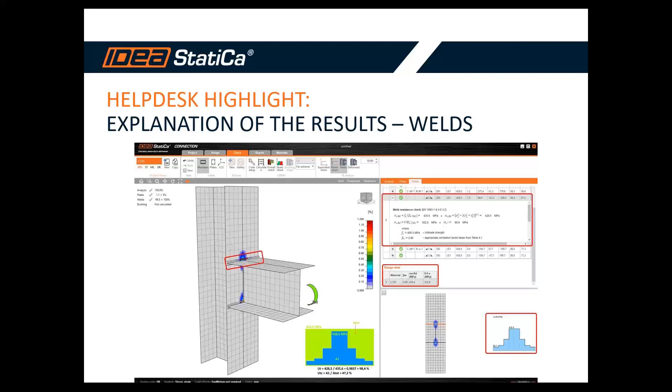All right, so let's jump to the project that I'll show you live. It's a project of a steel broadcast or telecommunication tower. It's designed by an engineering office, Tecom CZ, which is one of the leading suppliers of telecommunication towers and masts. They have designed a lot of projects all around Czech and surrounding countries, mostly telecommunication towers, but also watchtowers, which is quite a phenomenon in the Czech Republic. We have a lot of lookout towers just for touristic pleasure.

So they designed this, and of course analyze, calculate, and then supervise the construction. Tecom CZ is a long-time user of IDEA StatiCa, and they use IDEA StatiCa together with SCIA Engineer with the BIM-Link, and as they told us, that brought huge effectiveness into their design workflow and cut a lot of design time. So that was nice to hear from them.

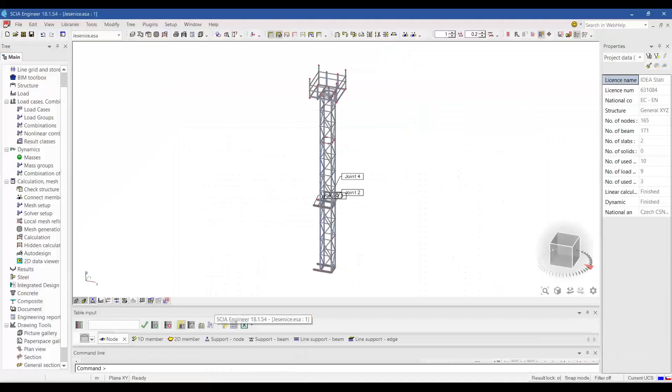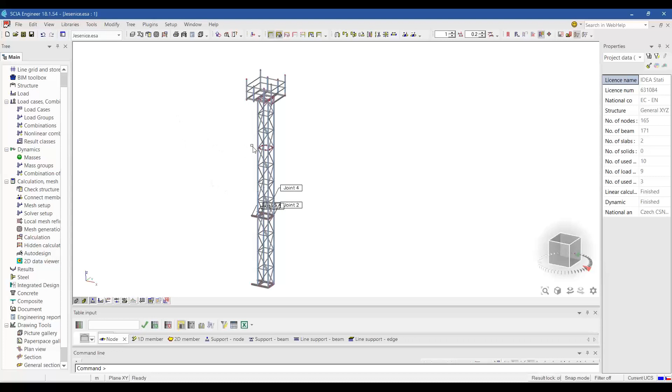So I will jump to the SCIA Engineer software, and this is the project that we got from the customer. That's the steel tower model, a global model for global analysis of the internal forces. So how does the BIM-Link with IDEA StatiCa work? When you install IDEA StatiCa on your computer, it integrates into your FEM and CAD software. SCIA Engineer is one of the FEM programs that we support with the BIM-Link, and that adds commands into the steel tab here. Here we get the IDEA StatiCa connection menu with two commands.

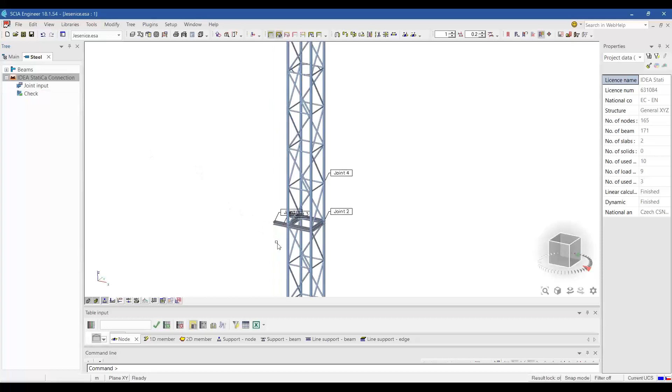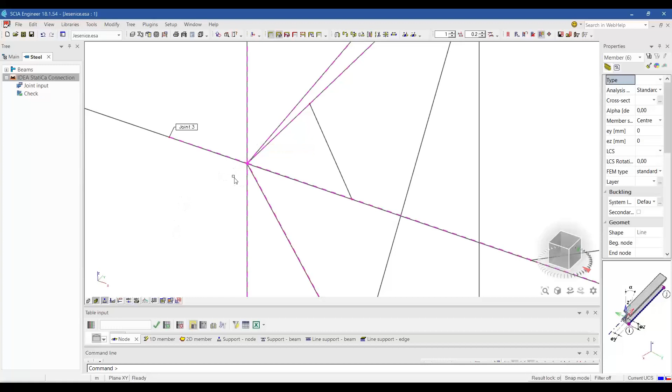The first one is to input a joint. So I will select one, the most complicated one here. Let me just turn off the 3D model so it's easier to work with. I select the joint and the members, click joint input, and type joint number 1, that's the name of the joint. Unselect that. Now I get this flag here, which means the joint is selected for IDEA StatiCa analysis.

With the other command, check, I run the command and select the flagged joint 1. That makes the export to IDEA StatiCa, which is going to open in a second. Of course, that depends on the power of your computer.

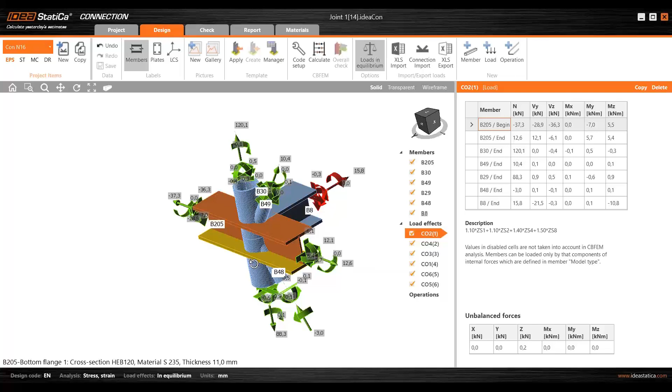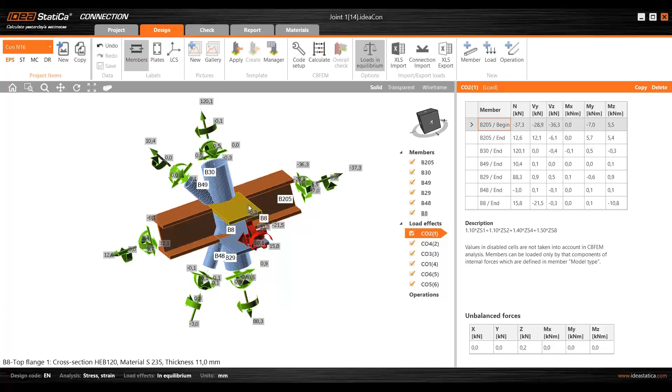If it's 2 seconds or 10 seconds, as on mine. Okay, and we got the joint in here. So what we can read from SCIA Engineer, FEM software in general, is of course the geometry. So we can see all the cross sections are imported and all the members are in place, and also all the combinations.

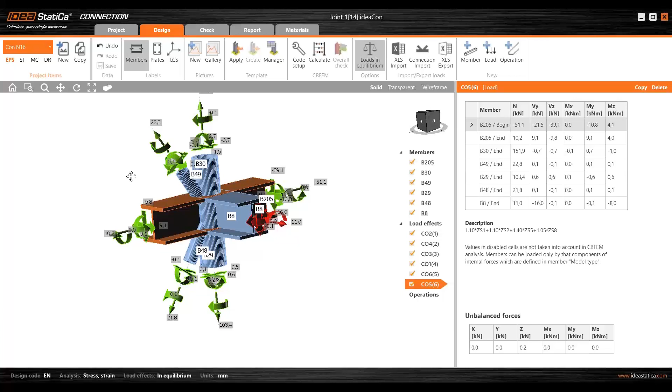Yeah, so we've got 6 combinations here. As we can see, all is in equilibrium, all's fine. We've got many internal forces imported just by one click, so that's great news. So the last thing here we have to do is actually do the design. This is not yet

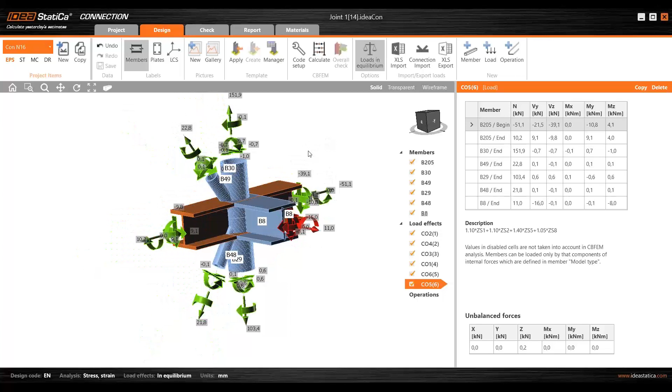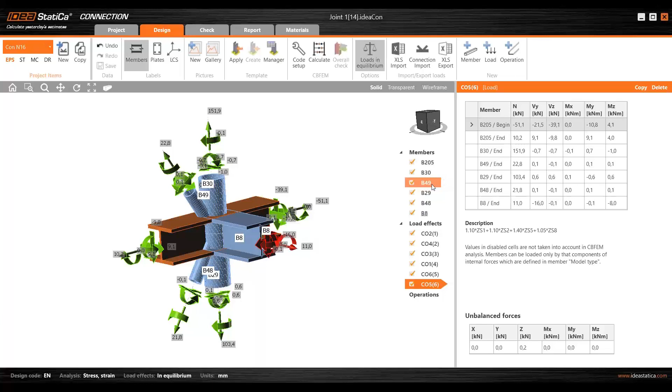automated. So let's do that, because actually it's kind of a pleasure to do that in IDEA StatiCa, right? It's kind of a game even that you play with the design of the joint. So let's start. I will start with connecting this bottom part. So just right click on the tube, connect it to the member.

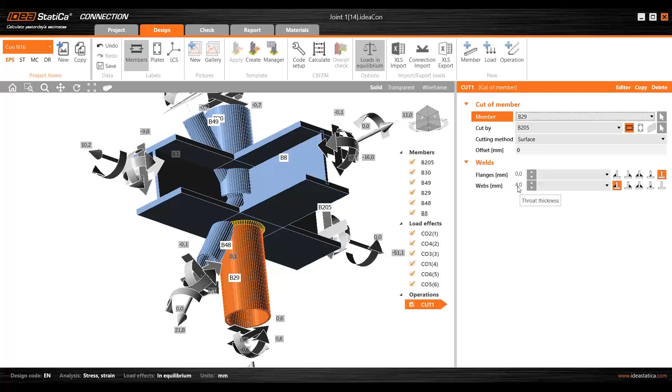I select a weld, and here I will just manage the weld options. So there are no flanges, so I don't need any weld here. I will have one side fillet weld, and I will input the size of 4 millimeters. Good.

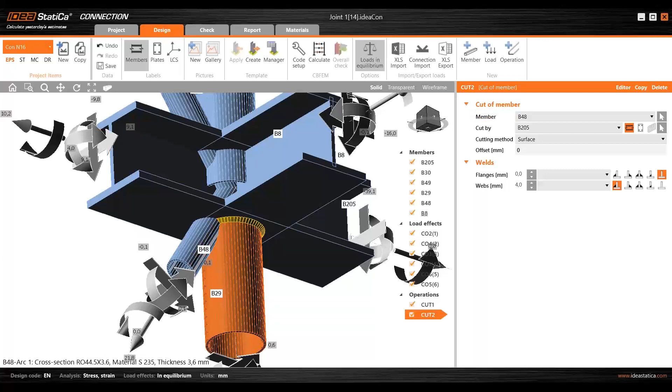Now I will do the same here for this one. And since I don't want to set these three things again, I will just simply copy this one and select this tube, which is now welded the same way. I will copy this cut command again, and now we'll select the main tube. Now they are welded together like this.

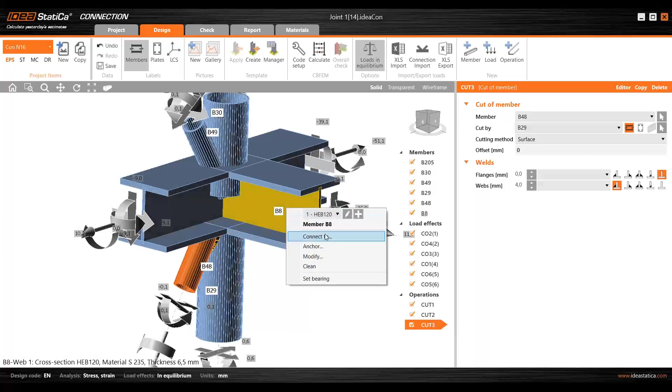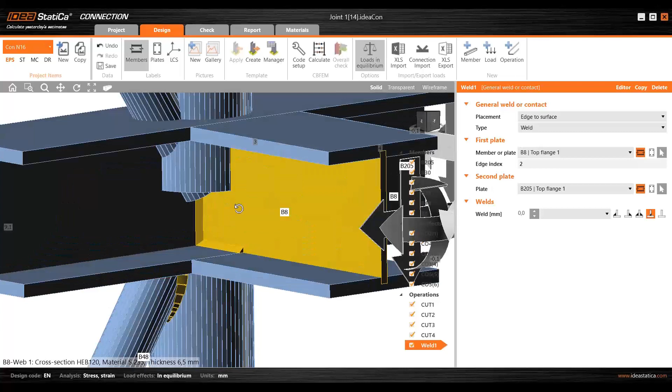Okay, so that's for the bottom part. That's done, and let's continue with the beam, the horizontal one. And here I will also weld this one to the main beam with this command. Again, I can just check here weld sizes. Let me see. This right-click command created two operations.

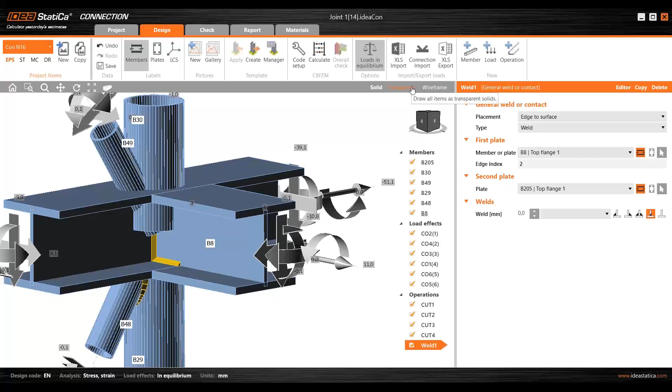There is no weld at the bottom flange because that right-click command is designed for a smaller side beam than the main beam, let's say. So I will just copy this and put it for the bottom flange of the side beam and bottom flange of the main beam.

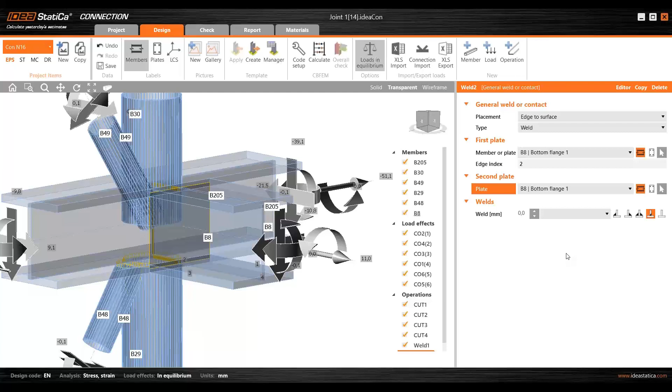Sorry, I made a mistake here. This, of course, has to be this main beam 205. Yeah. So a yellow line in place. We have it welded all together.

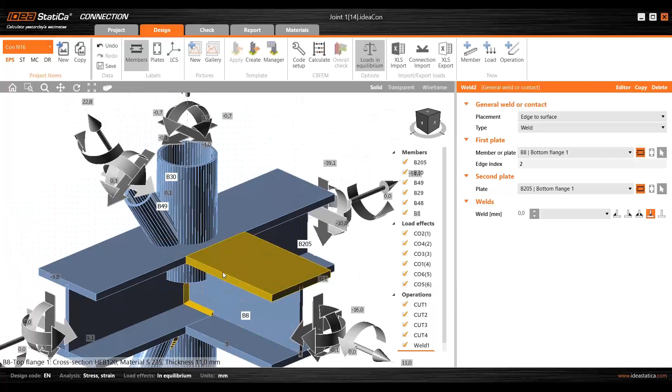Okay. And now the top part, and this is not welded because it's another section of the tower, and that is not welded but bolted because by the means of the construction, of course, some of the parts are prepared in the workshop and then delivered on the site and bolted together and assembled and constructed.

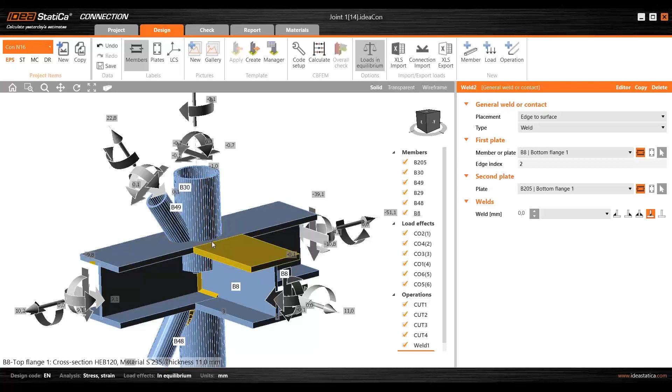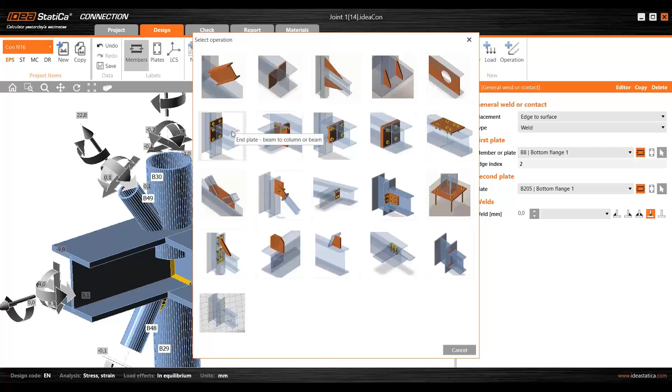So this is exactly the place in the tower, in the construction, where this bolting is done. So what we will use for the operation connecting this continuing column will be the end plate operation. And I will choose the bolt assembly of 8.8 bolt grade and M16 bolt size. Yeah. And I will select the column.

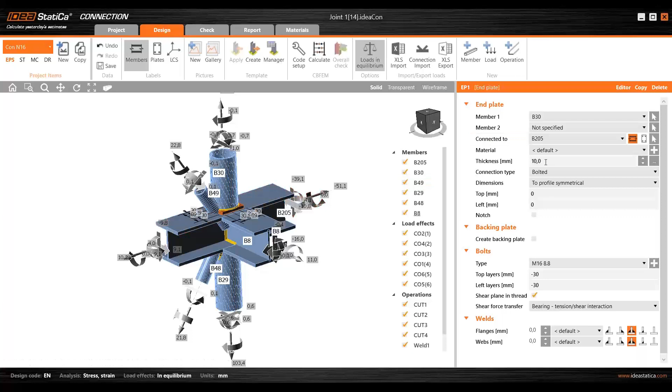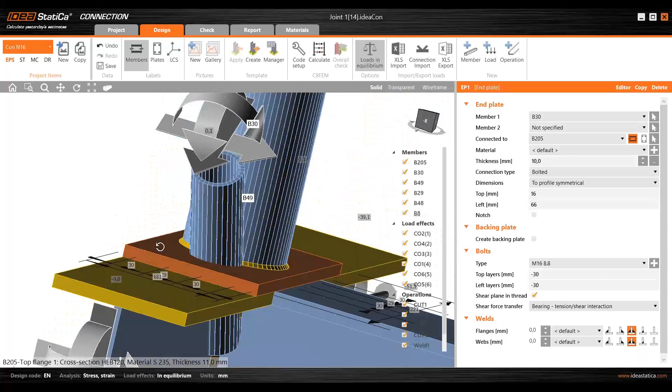Here I select the main beam. It's selected automatically already. And of course, I will just modify the settings here. I'm fine with the thickness of 10 millimeters. I will make the end plate somewhat bigger, so it's aligned with the top flange of the beam, like this.

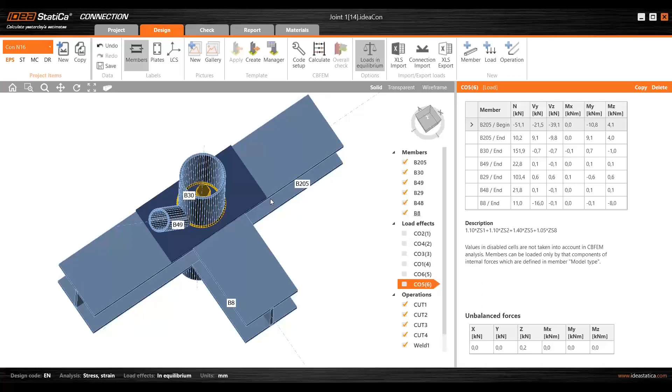And of course, I need to place the bolts, which are now inside of here. I can show you that by unselecting the forces here so we get better visibility. Let me scroll down back to the operation settings. So let me change this to -10 and 30. So this looks much better, right?

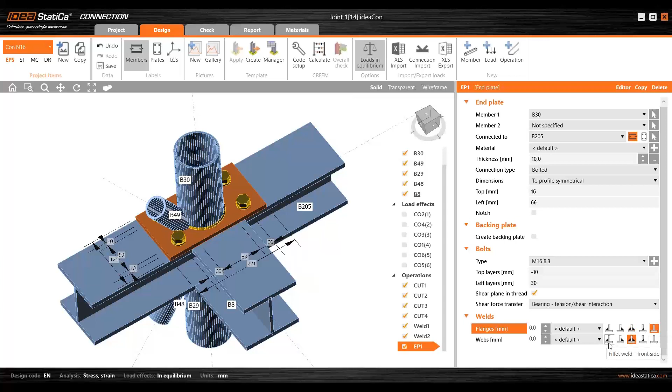And again, I will just turn off the flanges weld and switch to one side webs weld, and set 6 millimeters of thickness here because we have bigger forces acting on this column here. So we need a stronger weld. So I'll put 6 millimeters here.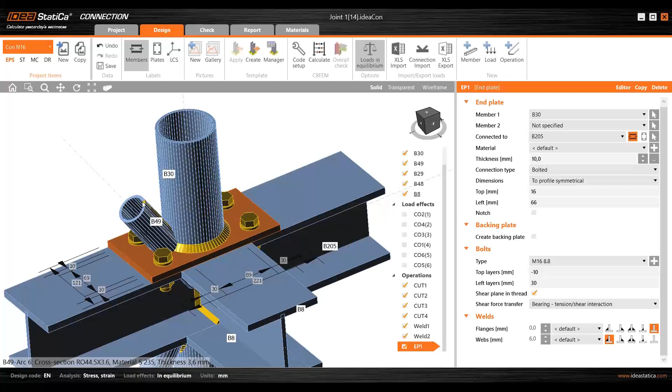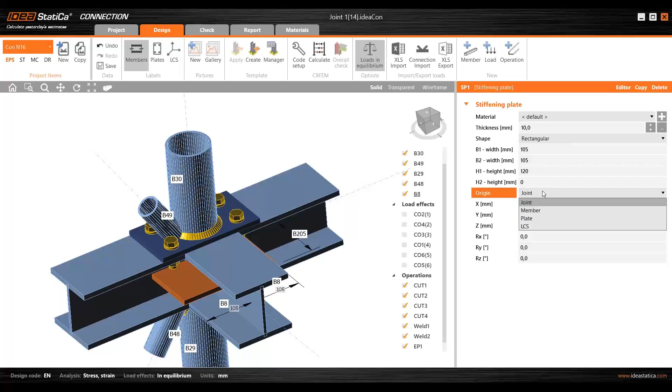All right, another operation will be a stiffening plate that cuts through these two tubes. So let's create that. Select the operation stiffening plate. And again, modify the parameters. So the size, thickness of 10 is fine. And I will place it at the origin of a plate.

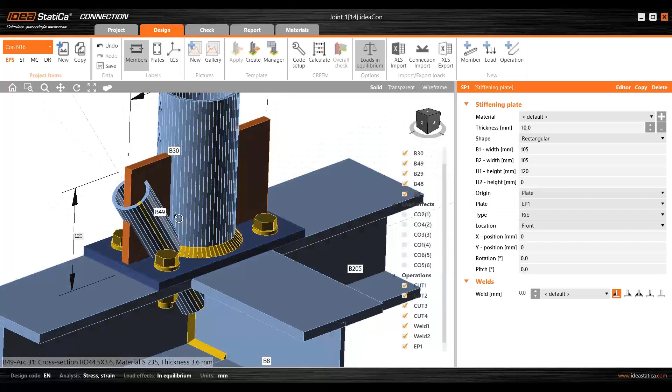And I will select the end plate, EP1. It's selected automatically because it's the only one in the model. So that was easy. And I will leave the rib type, location front. This is just exactly how I like it. So yeah, that's good. I will turn off the weld here.

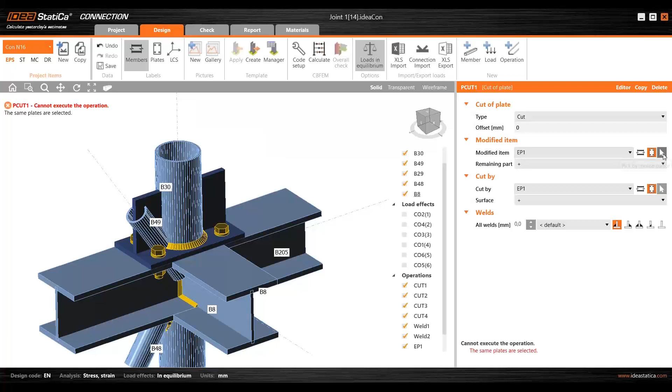And now I will weld these two plates together by a cut of plate command. So let me do that. I will select this plate, which will be cut by EP1 plate. Sorry, of course, EP1 plate is this one.

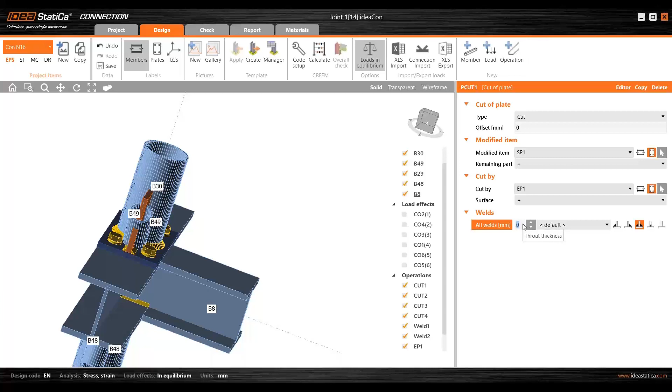Now just switch to double fillet weld and change the thickness to 4 millimeters. Good. This is all welded.

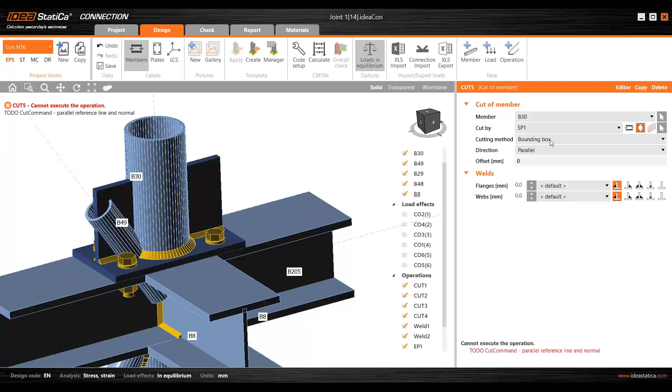Now let's cut this plate through the main column. For that, I will use cut operation, select column, switch to plate, select the plate, SP1, and switch to surface. Now the column got longer, and again,

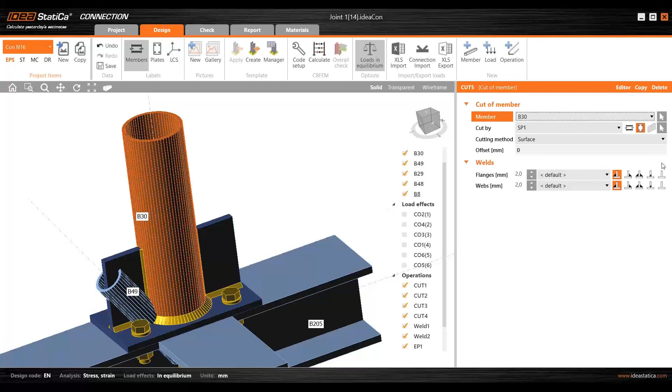I can just change the thickness of the welds to 2 millimeters and turn off the flanges because it's just on the web of the tube. So now it's here and not inside, of course, because we have only the one side fillet weld. And the last thing, this tubular diagonal.

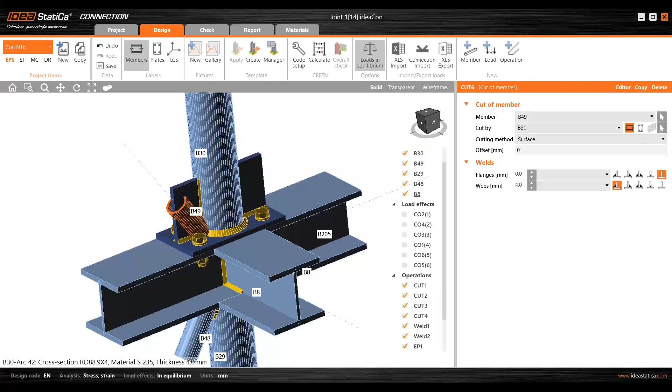So let's connect it. For that, I will just grab the first cut command and copy it and assign it to this one and to this one. So now it's cut like this. And now copy, switch to plate, assign it to the end plate one, weld is in position, and the last one will be,

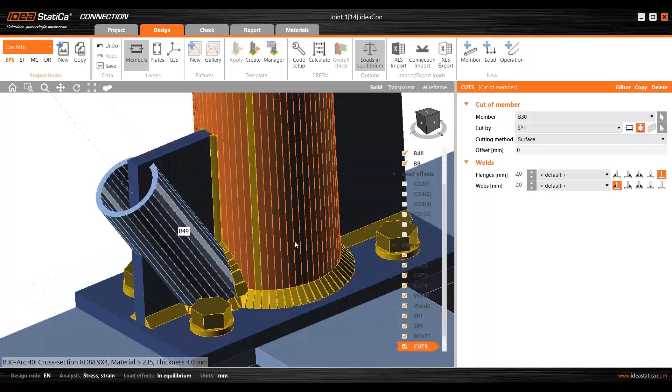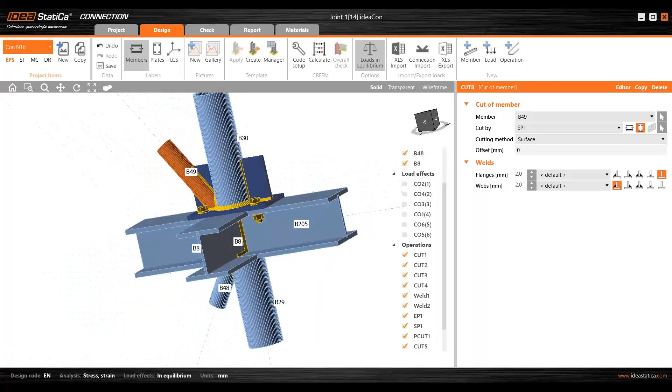if I click on this weld, I will get the cut command, highlight it and select it, and I will just copy it and change to this tube. So again, it's welded here, and that's it. So I will now turn on the internal forces or the loads.

We have the design done, and now we can calculate. So now by clicking the calculate, it will perform the analysis of all 6 combinations in a row. So that's going to take a minute, I guess.

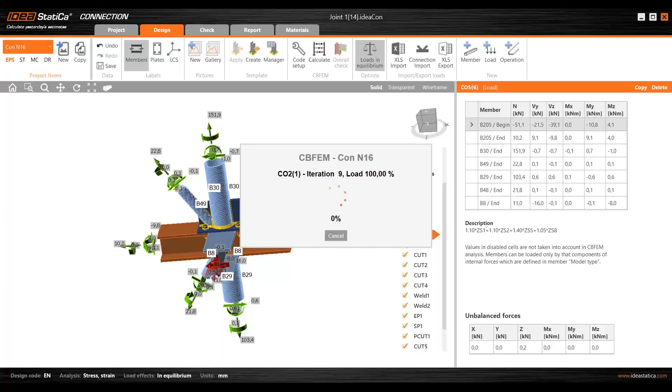So in the meantime, let me show you, if you are interested in this BIM link, let's go to the ideastatica.com webpage. We can go to resources. That's the resource center of IDEA StatiCa. And if we select connection here, go to tutorials, BIM links, and here you have the tutorials step by step for almost all the softwares that we are linked to.

So if you're interested in trying a BIM link with your software, if you have never done that, just please try this, because this is the future of the designing process, right? It cuts the time enormously, and we can see the SCIA Engineer tutorial. If I open that, it takes a second because my computer is working hard.

And here you can try this step by step. All is described: how to install the link, how to activate the link, how to use it, and the design of the joint to the end. Also, there is a chapter of how to update the project, which I'm going to show you as well in another webinar, because we're running out of time a bit.

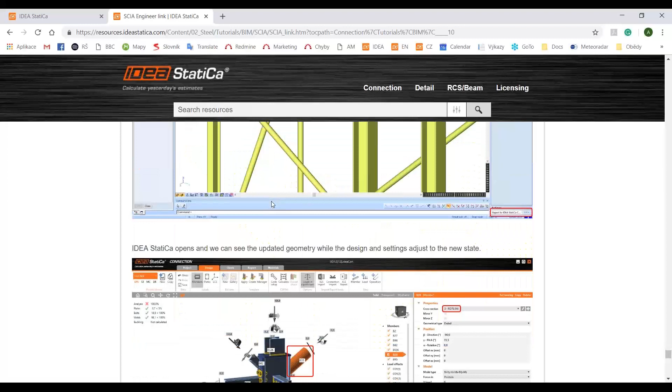And of course, here at the top, you can download the project, the source files for SCIA Engineer, which is this steel tower, and the completed joint in IDEA StatiCa as well, so you can study that.

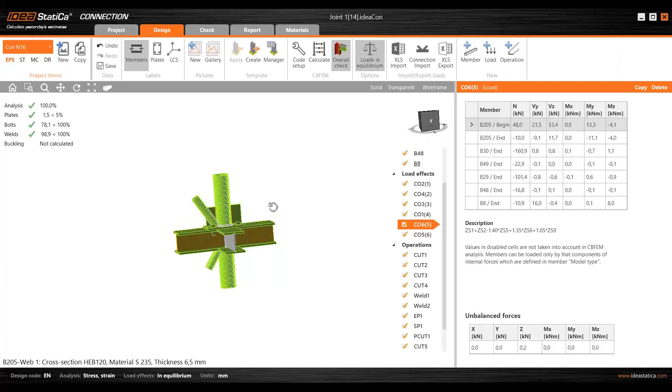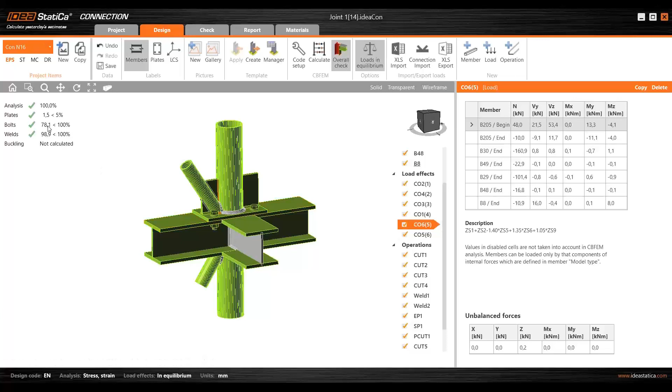Let me see. This is now done. This is calculated. So let's see just the overall look. All is green, orange weld, almost at the limit. So I passed the code checks. Design is good. It's actually quite efficient because I'm almost at the limit, but still on the safe side. So I have a safe and also economical design of this joint.

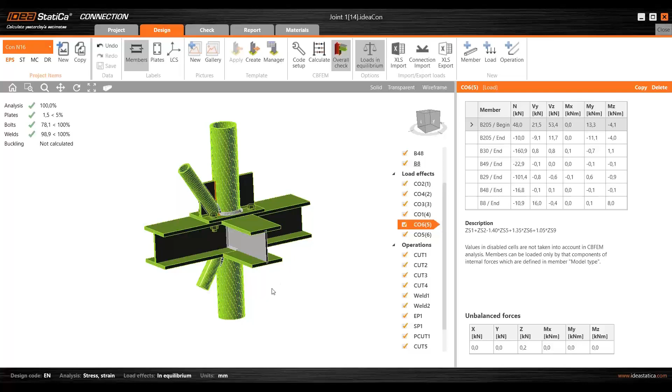So good. I can just save this now and close it. And now, if I go back to SCIA Engineer, it stays inside the project file of SCIA Engineer. So anytime I can go back, open the SCIA Engineer project, and I can open again any of the joints that I have already designed and calculated.

Everything stays there. So let me see, for example, I will open this one and show you one more trick how to save time. So I'll open this joint 4. Again, a few seconds. This is what I have already prepared in advance. I have designed the joint, I have calculated it. So let's take a look at how it looks.

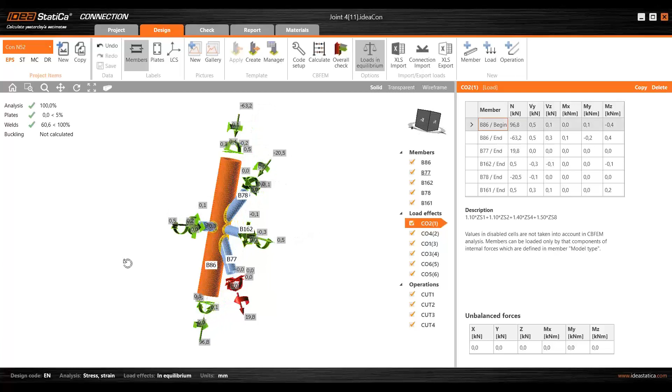Okay, this is the shape. Again, we have 6 combinations imported, and in this case just 4 operations, all is welded, a simple design. And we have all the results still here, so you can go back to this SCIA Engineer project and reopen any of the joints, and you have all the information there, nothing is lost.

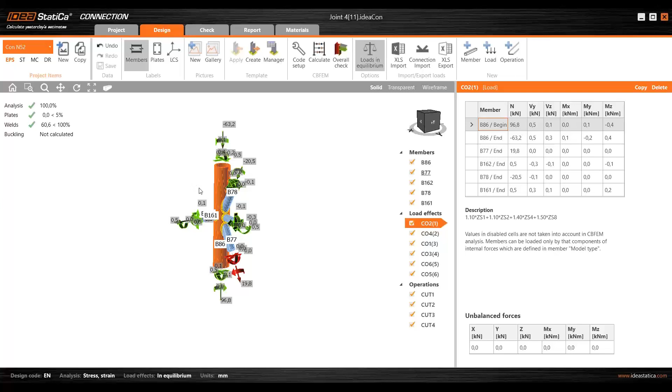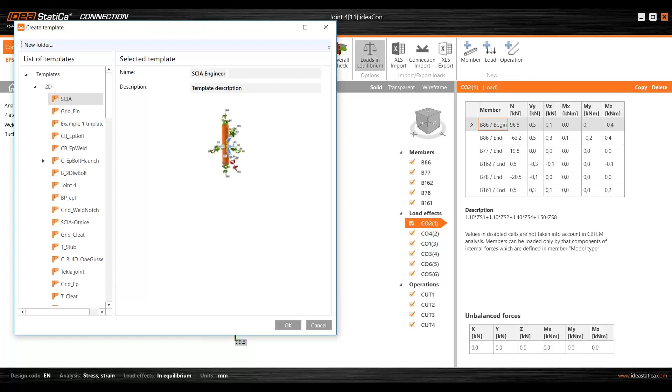And now the trick: if you have a structure where the shape of the joints repeats, like this tower, and you want to code check more of the joints with the same design, you don't have to design each joint one by one, but you can use this template feature to help yourself. So I will create now a template of this one. Let's say SCIA Engineer joint 4 template. Okay, now it's saved inside your IDEA StatiCa software.

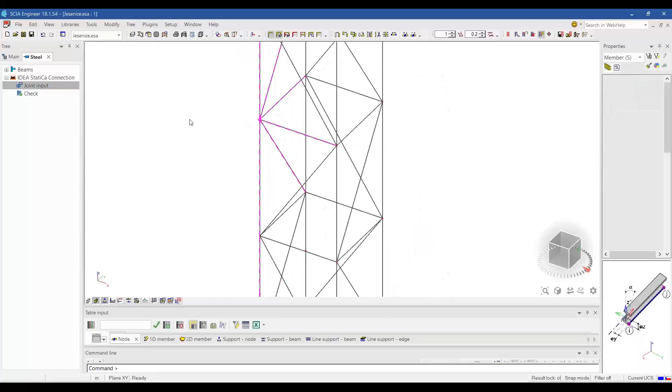I will close this and I will select, for example, this one, and I will say joint 10. So there's the flag. I will open it, and that will be, of course, just a blank joint, just with geometry and internal forces.

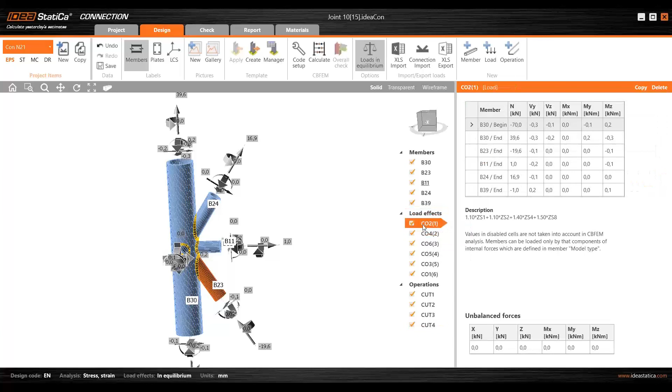And because I would rather have a coffee with my colleague than spend time clicking all the operations and design, I will just apply the template. SCIA Engineer joint 4, that's the one. Apply. And I got it. So now, to cut time, I unselect all the combinations and let it calculate just one.

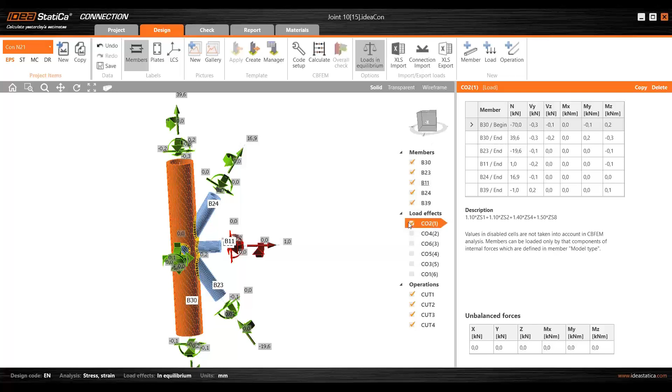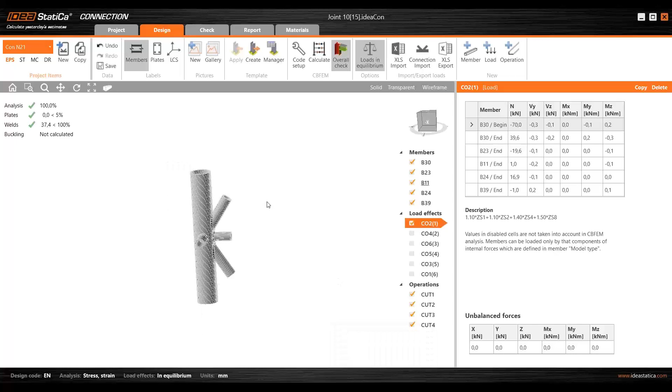And this is how you can do more joints. And now imagine you have some complex design of a joint with, let's say, 20 operations that you would have to click and set every time you would like to code-check the joint within a project or a similar project. It doesn't have to be just this concrete one in SCIA Engineer. It can be any other. This template stays with your IDEA StatiCa software, not with SCIA Engineer software. So yeah, this can help you a lot.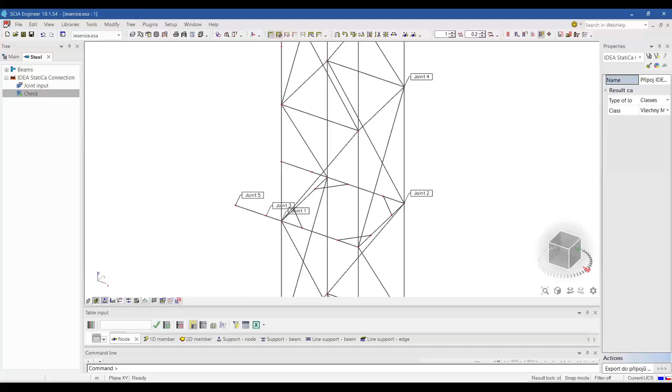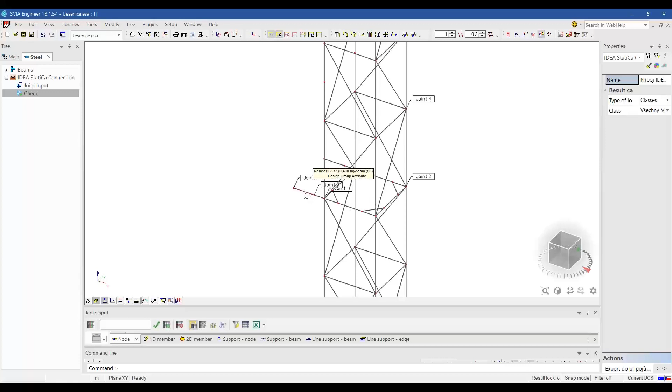So I think that's it. I could continue because I really love this feature of this BIM link, how efficient it is, and what a pleasure it is to work with that. I have more joints here exported to IDEA, the anchoring here as well, and so on. But I will leave that for next time because it's already 11:30. So I will pass the presenter to Reed to comment the weld results. So thanks for now, and I'm passing the presenter.

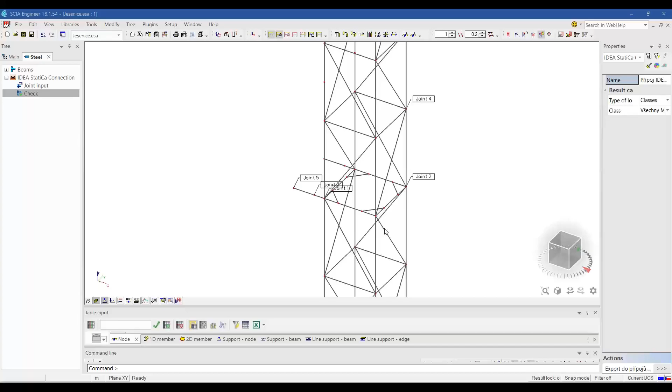Thank you very much, Adam, for a really nice example of everyday engineering practice. And we can continue with our webinar. At the start, I want to point out that we will talk about the results of the welds. But at the beginning, I want to show you that we have all things that you may encounter in our frequently asked questions. And if we talk about design and explanation of results of welds, we have here a really nice frequently asked question: How are welds modeled in IDEA StatiCa?

So let's just open it. And we can see on a few examples with a description how welds are modeled, how they are behaving. And for example, this is a really nice one because all of you steel experts are familiar with a typical T-joint welded connection between beam and column without the stiffeners, which is important because then the weld is not acting along the whole length of the weld in the same way. And we will discuss this more in an example.

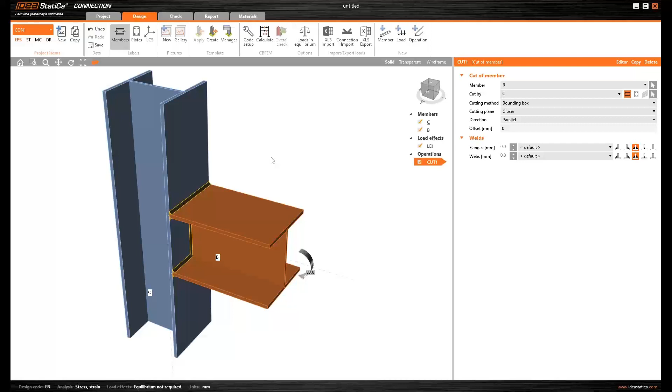I prepared for you this connection in the IDEA StatiCa Connection application, and we have column and the beam with the same cross-section, HEA 200, and we have only bending moment 50 kilonewton meters. We created the connection by cutting the beam and welding it together. And what about the welds? Of course, they are double fillet, but what about the throat thickness?

We have two options. First one is that we will type in our desired throat thickness in millimeters, but if we leave here 0 value, then the application will input the value automatically, and the value will be calculated as default value, half of the thickness of the flange or web. So in this case, we have the top flange thickness 10 millimeters. So our automatically calculated throat thickness will be half of that, which is 5 millimeters.

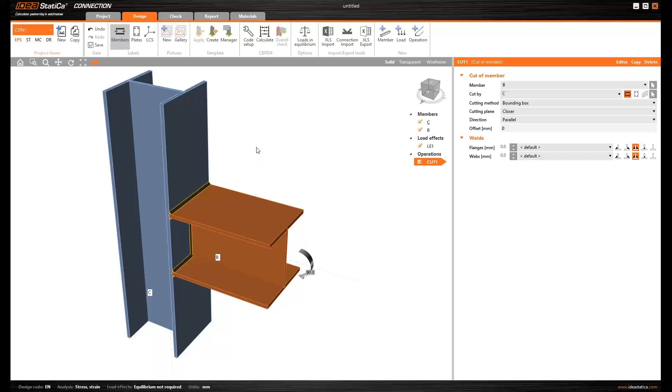And I can see it while pointing at the weld in the 3D scene in the left bottom part of the 3D scene window. Can you see it here? Right here. I will point it on the weld again, and you can read it. Thickness is 5 millimeters, which is a nice feature because you don't need in the first step to design your throat thicknesses on each weld manually. You can just leave the 0 there, and if it's necessary, change it later. So let's calculate it. It will be in a second because it's an easy connection. And let's continue to the checks with some better explanation.

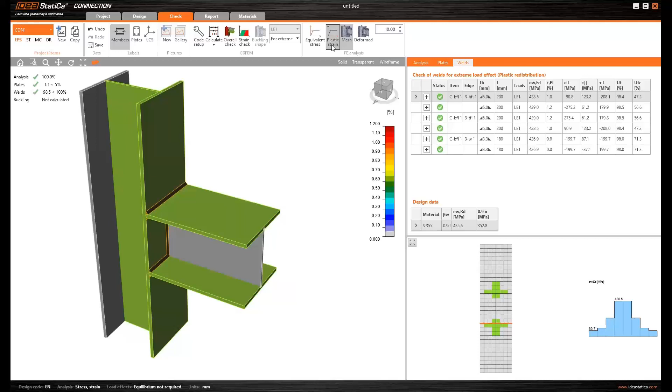Now I will turn on the plastic strain, and I have turned the mesh on, which gives me a nice view on the meshed weld. And you can see our weld is divided in 8 finite elements. It's a 2D element, and it corresponds with geometry of the weld. It has its own working diagram. It corresponds with the stiffness of the weld, etc. And this finite element is also evaluated. It's evaluated here in the tab for the description of the results.

So if I click in the 3D scene on this weld, it gets highlighted in the tab, and I can explore it even more. So here, by clicking on the plus, I can see the formulas and values which are used for the code check by code procedures, which is interesting because I can calculate it on my own just for control, or I can see what's happening inside.

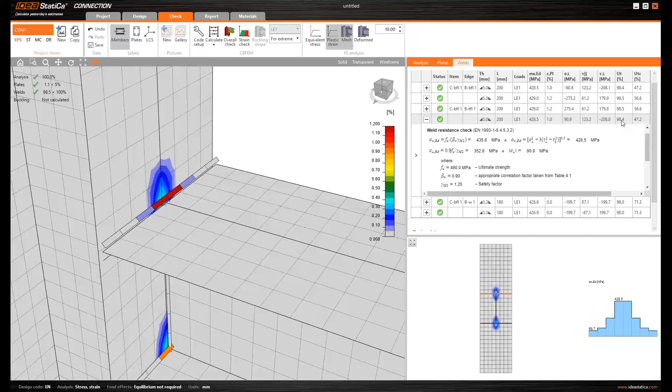And what else do we have here? We have here, which is most important, length of the weld, throat thickness of the weld, the critical load effect, which is code checked, and lots of values of stresses according to the code. The last two are the most interesting ones. UT, stress utilization. And you can see I have here 98 and almost 0.5%, which is quite a lot. It's almost at the limit. But there is a but.

You can see that here are 8 finite elements, and every single element is colored. And these ones are red, and this one is blue, and these are gray. They are not utilized much. And this one, 98.544, is only for the maximum element, which is utilized the most of all of them, the middle ones. But the UTC is the capacity of the whole weld, so the capacity of all 8 finite elements. This one, this one, this one, etc.

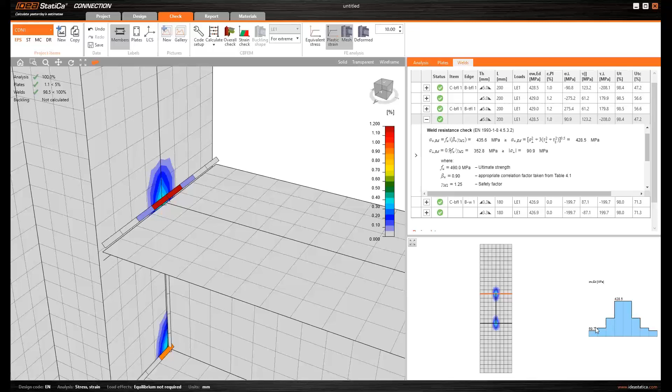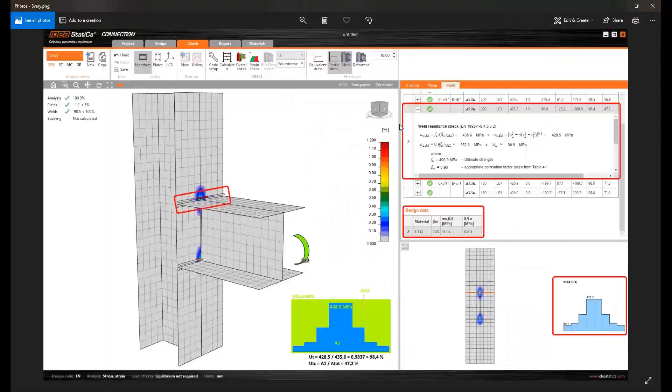And it's some capacity which is calculated by the integration of the area of the limit. And I will show you how it's calculated. Just give me a second. I prepared in advance for you this picture. It's the same connection, but in just a little bit different view. And I just marked here the weld. And the weld is here, all the data, you can see the same result. And here is the design data for our chosen material.

Here is the diagram. We have here a stress value for every single finite element. This is the maximum and this is the minimum. And how the UTC is calculated and what this diagram will show us. This is the blue part, and the maximum is 428.5 megapascals in the maximum finite element. And this blue area I will call area A1. And this green rectangle has a limit 435.6, which is calculated here. It's called limit value. We can call this area A total, as a total capacity of the whole weld.

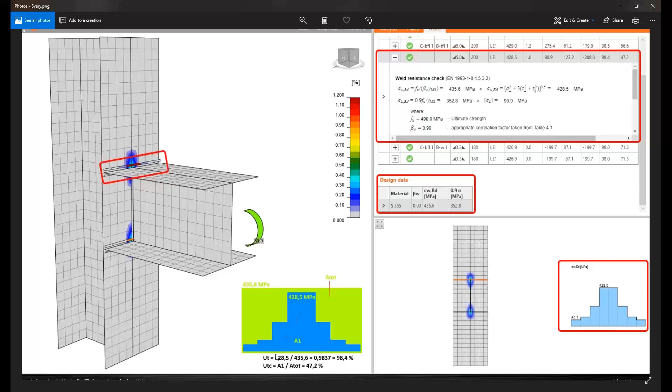And if I calculate the values like this, it will give me the usage of one finite element or of the complete weld. And you can see here, which is interesting, that in this scenario, we did not design the connection or the weld in a good way, because the weld is utilized only in a small area. But from my point of view, I want to design the connection in a way that the weld will be utilized along its whole length.

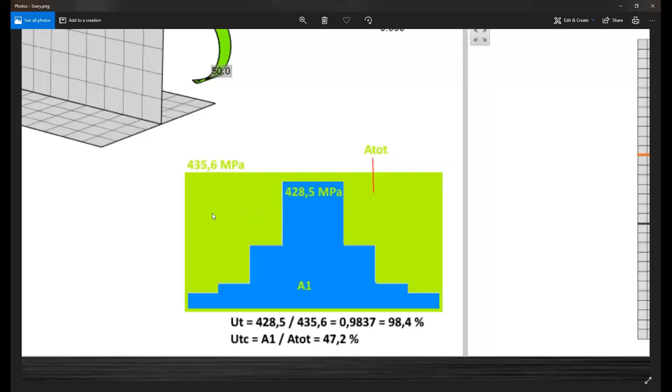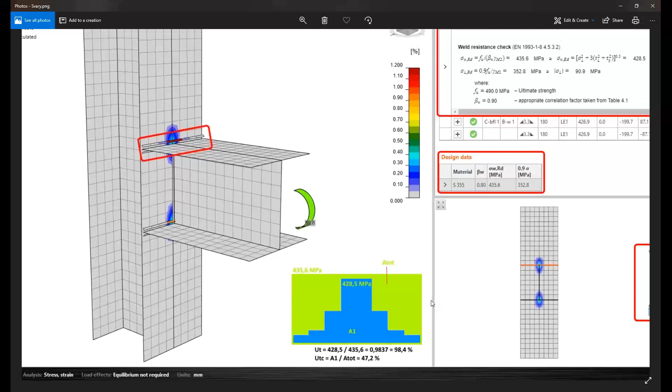So for me, the information is to get back to your design and insert, for example, a stiffener here, so the flange will not deform, it will be stiffer, and then probably the level of the stress will be more equal along the length of the weld. Okay, great. And that's the last thing that I wanted to show you. And I hope it will help you to design your welds in a better way.

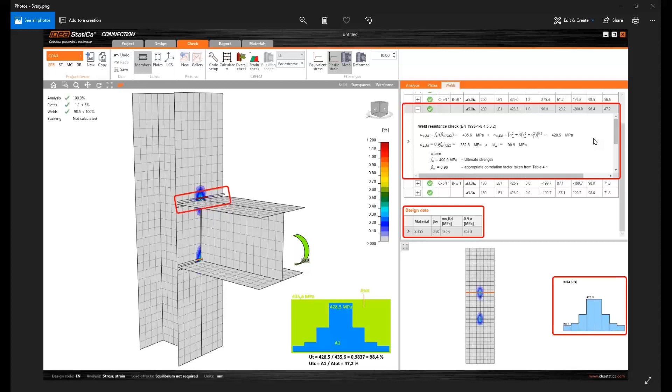So I will pass the word back to Adam, and he will finish the webinar. So Adam, it's up to you. Thanks, Reed. That was really explaining the whole thing behind the welds. I hope you learned as much as I did.